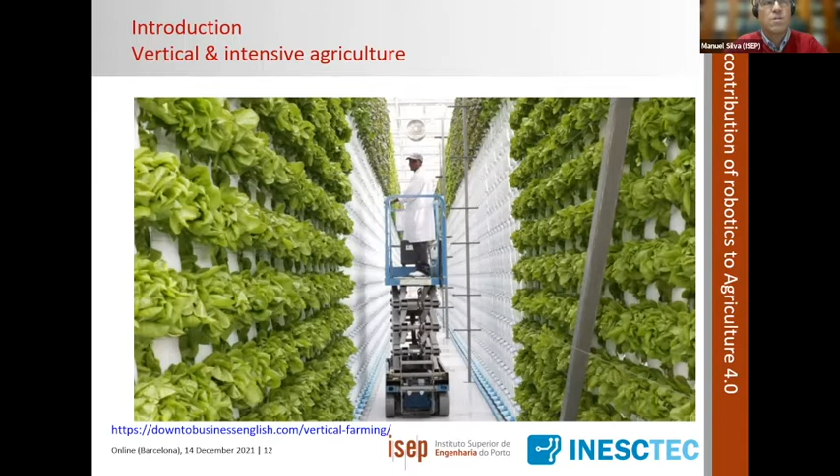Besides that, in order to reduce meat consumption, we have tried to develop lab-grown meats, but there are also several consumers that don't appreciate or that have some resistance to this sort of solution.

Besides this, one other alternative might be the use of insects for human consumption, which is also presenting several difficulties of being introduced in the market. So this is the present situation.

What we see from this is that there are several challenges being faced by agriculture. What we try to achieve is to have more sustainable agriculture, but we want to reach this sustainability without compromising productivity. So we want a sustainable agriculture that is competitive.

We can increase part of this, or have agriculture more competitive, by using some of the already available technology and also developing new technology. Here I am considering robotics. So the solution is to develop what we might call precision agriculture, or agriculture 4.0.

For me, these two concepts are very related, almost the same from my viewpoint. For those who are not aware, precision agriculture is a management strategy that uses electronic information and other technologies to gather, process, and analyze spatial and temporal data.

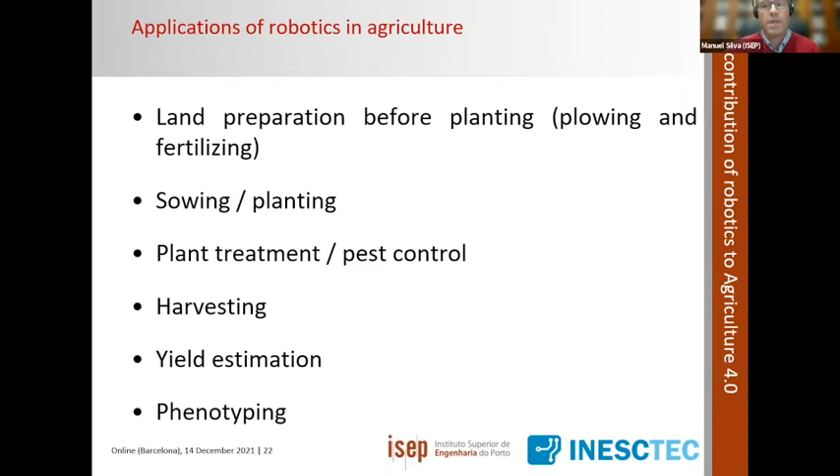And finally, on a smaller scale, we also have some robots for yield estimation and phenotyping of plants. Regarding all these applications in agriculture, robots are required to comply with at least four key areas. First, we need to choose an adequate platform for the mobility of the robot and for steering - the mechanical part of the robot, though there also needs to be electronic control of the motion.

Then, if we want a robot that performs something useful, the robot needs to go from one point to another - for instance, it needs to move between the crops without damaging them, and know where it is so it can apply some fertilizer or herbicide in a specific spot. This is what we call localization and navigation. It needs to know where it is - localization - and go to the spot we want - navigation. Robots also need to be able to sense the environment, sense the crops, sense the plants,

and also detect the targets on which they want to perform something useful. Finally, depending on the type of crop or fruit we're considering, the robot needs to have an appropriate end effector. This can be a spray tool for spraying herbicides or fertilizers, but it can also be, for instance, some sort of cutter for pruning or a gripper for picking berries or apples or oranges or stuff like that.

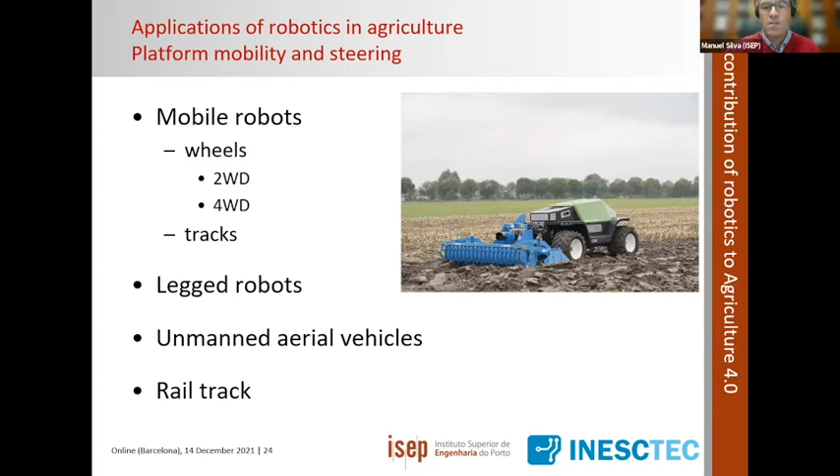One solution to overcome some of these problems is to use tracked robots. However, tracked robots have the difficulty that they destroy the soil - when they go several times over the same spot, they compress the soil, and this damages some of the soil qualities. So an alternative is to use legged robots.

We are witnessing a huge investment in legged robots, and we are now seeing the first legged robots being developed for agricultural tasks. Legged robots have the possibility of walking on very difficult ground, with steep slopes, rocks, ditches, and they can place their feet on disparate spots on the ground. So they can, for instance, avoid obstacles and holes on the ground, and they don't damage the crop.

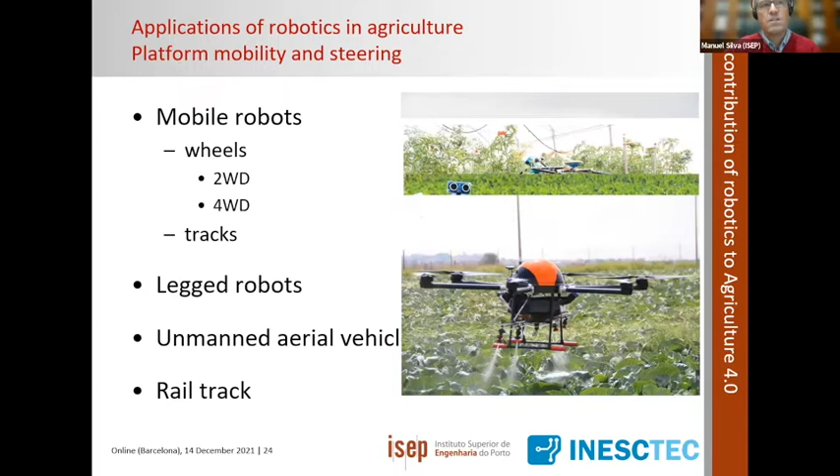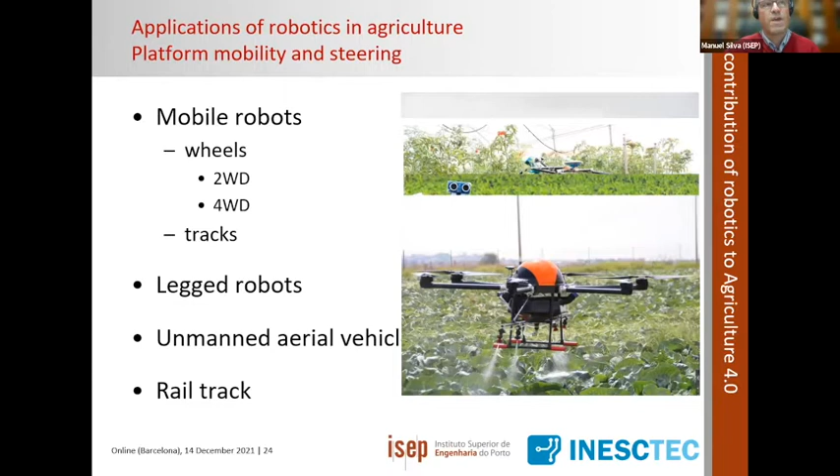So they can, for instance, place the feet on places where we don't have plants. Another alternative is to use unmanned aerial vehicles, mainly for spraying and also for detection of yield estimation and detection of health problems in plants. And finally, mainly in structured environments like vertical farms, we see the use of rail tracks for robots that run along the entire crop.

The other situation is localization and navigation. This concerns the movement of the robot through the crop fields. What we want is the robot to go from one place to another without damaging the crops and also avoiding obstacles. This is a very, very challenging task for autonomous robots.

In closed environments, for instance in factories and even inside houses, we are already able to develop robots that present very good localization characteristics. They are able to follow what we call natural marks, making a map of the environment, and based on that map, they are able to go from one place to the other.

But typically, that is not the situation on crop fields. While in factories and houses those natural marks are typically static and don't change over time, that does not happen in crop fields. Plants grow, we have branches that fall on the ground, some plants die, and so these natural marks just disappear.

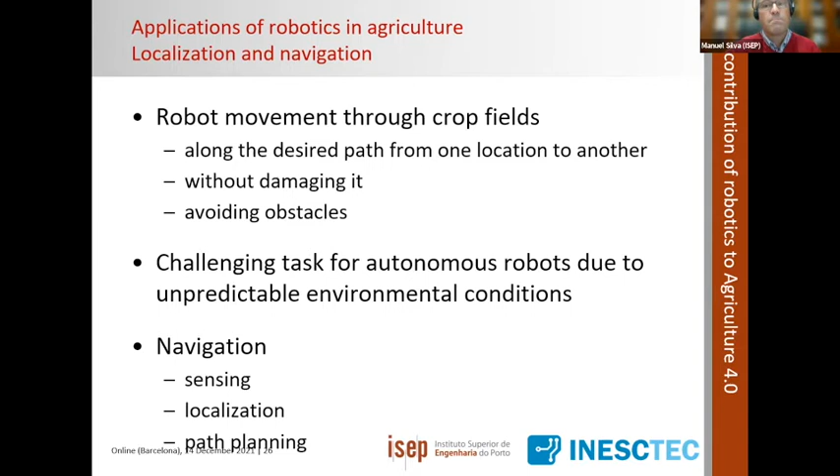Another problem is that in factories and inside homes we have environment conditions that are more or less static, so we can control the illumination. We don't have fog, we don't have dust. When we are outside, all these factors degrade the performance of sensors. So it is still relatively difficult, and presents several challenges, to develop robots that can perform navigation very well in outdoor environments.

So researchers have been using several different navigation technologies, mainly based on global navigation satellite systems. This is what we usually call GPS, but it's not just GPS, there are other systems for this.

But GPS has a problem: if we cannot spot the signals from the satellites, so if they are not in our line of sight, we lose the signal. This is sometimes a problem when we are working, for instance, in orchards where trees are hiding the signal.

So for this, we need to join these technologies with other technologies, like the use of inertial measurement units that measure the linear and rotational accelerations. By double integration, they allow us to see how our position, or the position of the robot, is evolving.

Another possibility here is also to use visual odometry, so to use information from cameras, from artificial vision, to understand how we are evolving on the crops or on the fields.

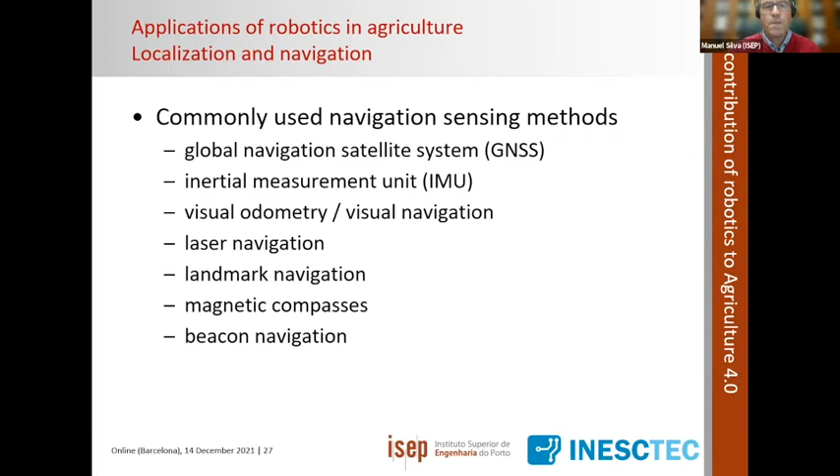Another situation that we have, and it's a very important one, is the question of sensing and target detection. This is one of the most relevant applications in agricultural tasks, and this is the core problem, because if we want to do something useful, we need to identify where we want to perform that work.

So we need, for instance, to detect if the plant has some health problem. We need to detect where we want to pulverize or spray a plant. We need to detect where we want to cut a branch if we are pruning, and we want to detect where we can find a fruit if we want to pick it up.

This also brings lots of problems to researchers, because plants are not all equal. They grow with different orientations, different characteristics, different colors. When we are in the field, we have different sun orientations, from the front, from the side, and all this makes it very difficult to clearly identify all these situations.

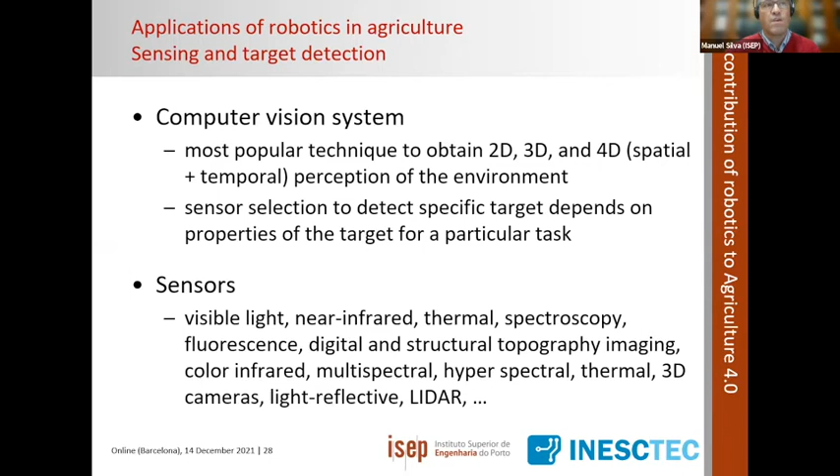For this, what we have been using is mainly computer vision systems with several different sensors, and we still have not found any particular sensor or algorithm that can solve all of the problems we have been facing. So this is also a continuous research line.

Also considering sensing and target detection, we have to consider that when we are trying to detect the targets, we also have different needs and different phases. So first, we need, for instance, to detect vegetation.

For instance, if we are picking up some fruit, we need to detect where the leaves of the plant are, since these leaves can be occluding the branch that we want to cut. So we need to detect vegetation from one side, and then we need to detect, for instance, some pest or branch to cut or some fruit. Besides all the problems I've already spoken about, we also have the need in the same robot or equipment to detect different things. This is more challenging than the applications we have in industrial environments.

Finally, regarding the targets, the detection of these targets can be very distinct depending on the tasks. If we are interested in land preparation or sowing and planting, in these cases we are mainly interested in detecting the area on which we want to perform our tasks. So we don't need very specific artificial vision systems or vision algorithms.

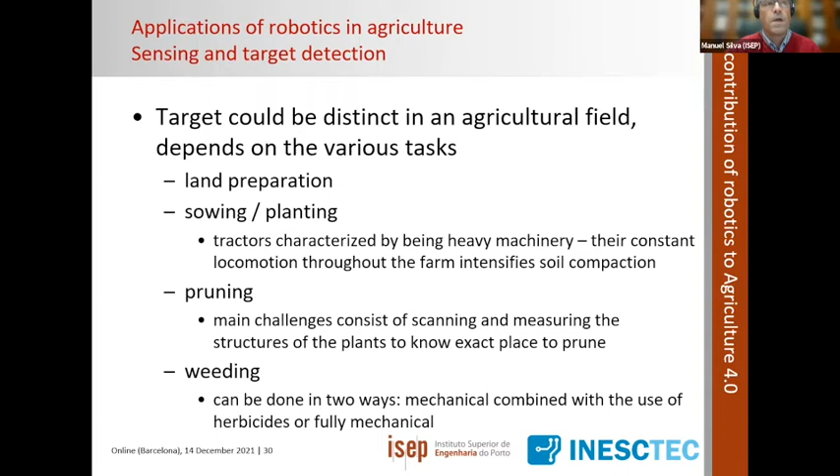If we want to perform weeding applications, we need to detect the plants and differentiate between the crop that we want to grow and what is a weed that we want to eliminate.

If we are concerned with spraying applications, we need to be concerned that leaves change color and shape with their growth. So there are already several problems besides those concerned with plant health. Sometimes it's very difficult to detect plagues on plants because, for instance, the insects are on the opposite side of the leaf. So more problems are presented here.

Finally, when we are considering harvesting or fruit picking, one difficulty is that the robot must go from plant to plant, detect the fruit it wants to pick, and pick it up without damaging the fruit. So this is also a very difficult problem.

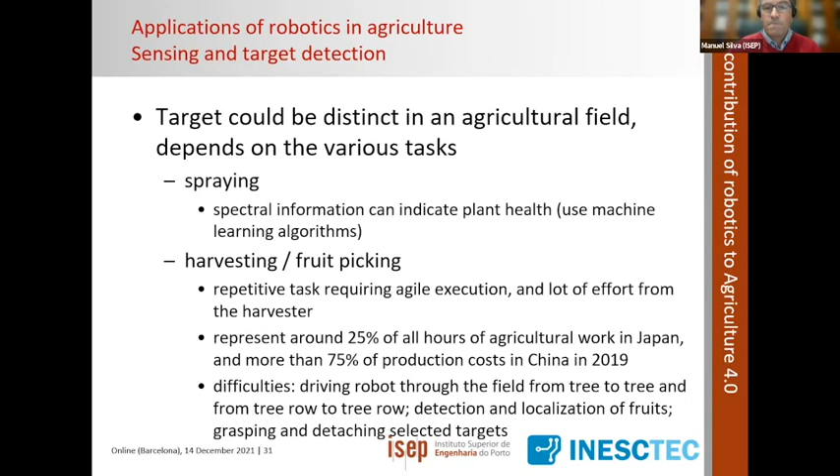Based on this, I'm just going to present now two projects. I had more information here, but I don't have the time. It's two very brief projects from INESC TEC, okay?

At INESC TEC, we also have a team working on research for agriculture. We are mainly focusing on the development of robots and automated solutions for these tasks. Our roadmap is mainly this: we started with monitoring applications, which are, let's say, the easiest ones to solve, although there are already several challenges. Then we are going up the scale to spraying, pruning, and harvesting.

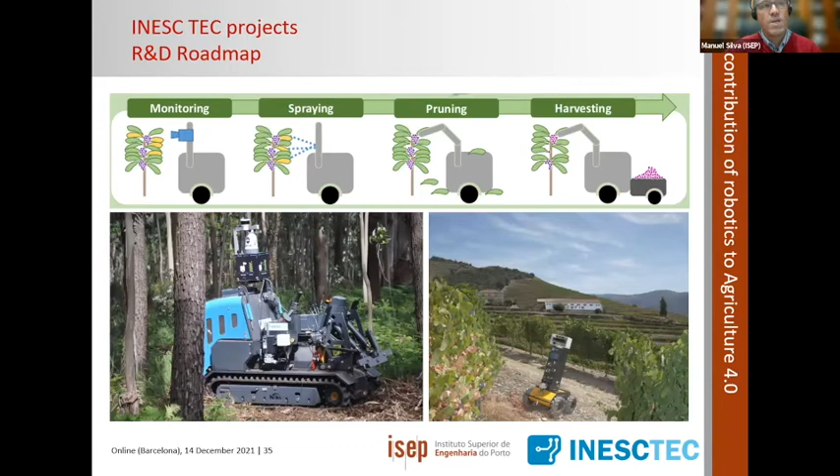What I'm going to present, I will just skip these two slides. I will start by presenting this video with some robots that we have developed, and while the video is being shown, I will describe the robots. So here I'm going to present the AgRob version XX robots. I will talk about version 14 and version 16. These were two of the robots we have developed, mainly for applications in the vineyards of the Douro region.

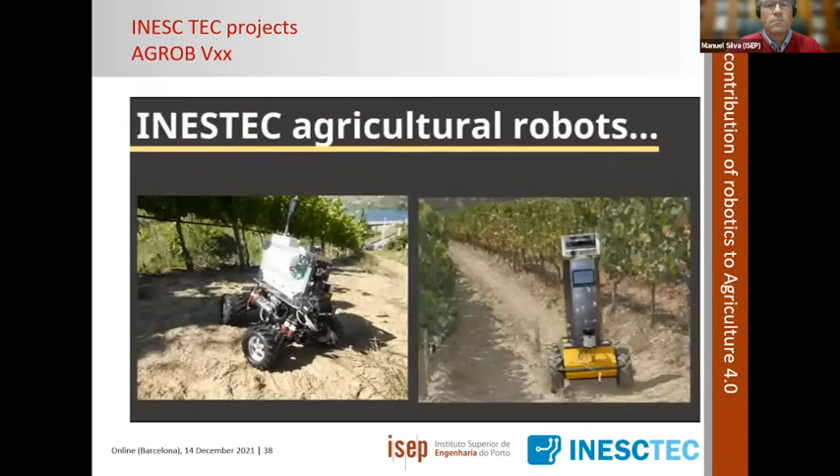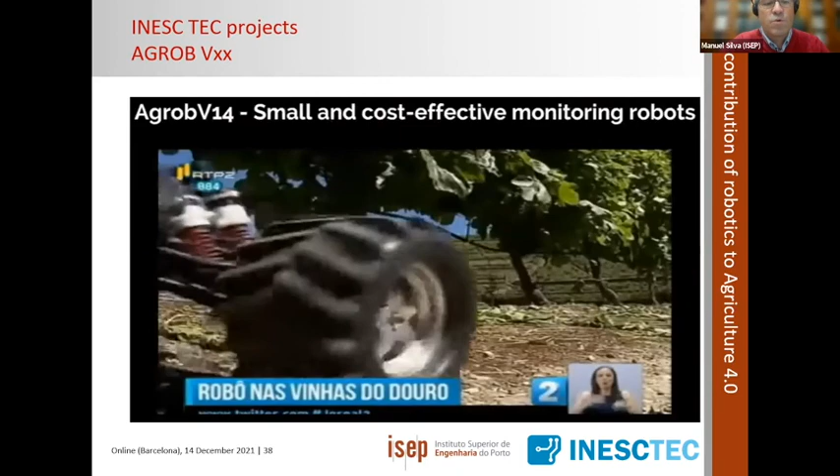So this is the AgRob version 14 robot. This was a robot developed to monitor the vineyards of the Douro region in Portugal, and those vineyards are in steep slope terrain. And this one is the AgRob version 16.

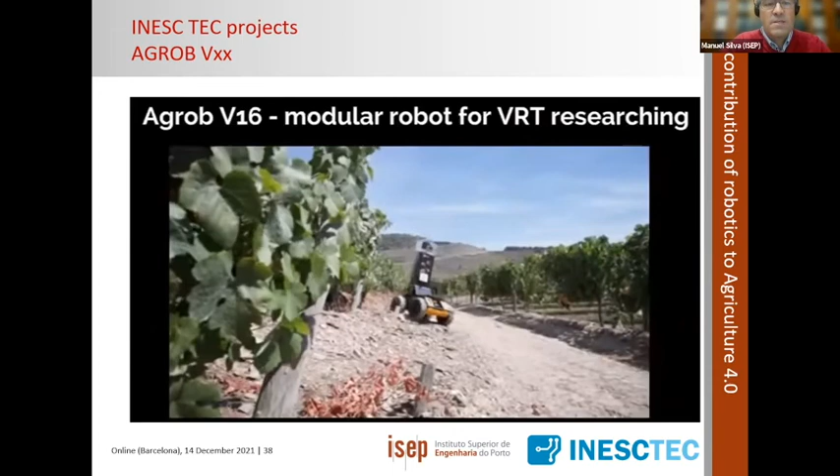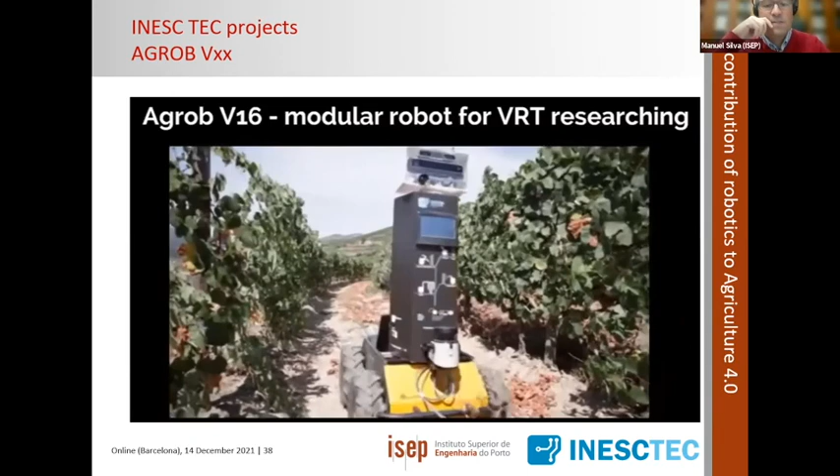It's a development of the previous robot, so it's a bigger one, and it's developed for yield estimation and pruning tasks. We have mainly worked on improving the robot's localization and positioning. What we are seeing here is the use of artificial vision systems to detect the plants and, based on that, to be able to localize the robots.

So this is the version 16 robot, and we can see it now working on some vineyards, being able to follow those steep terrains.

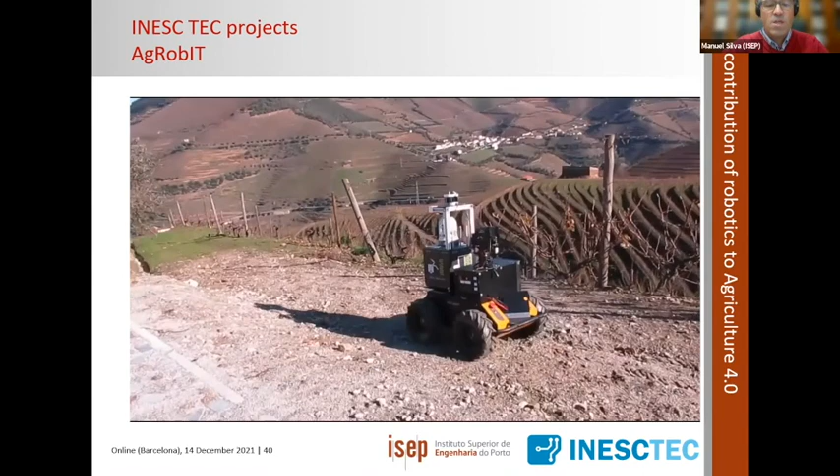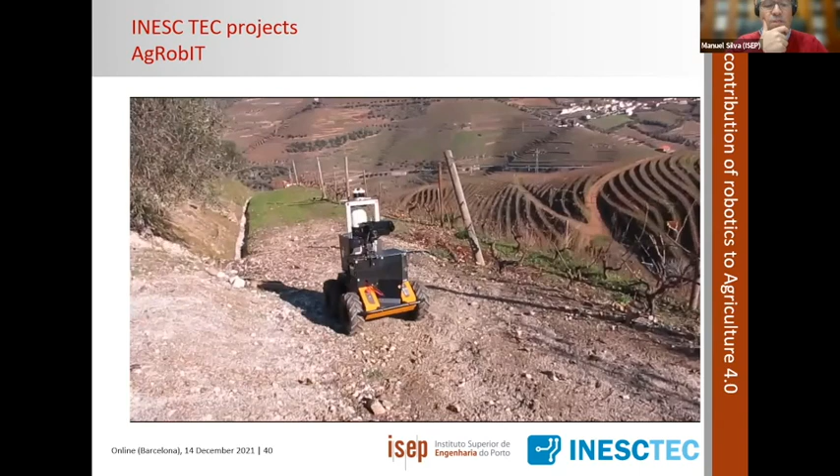For this robot, to improve its localization and positioning, we used a wireless sensor network, and we integrated the concepts of IoT and SLAM. This robot reads what we call the received signal strength indication. There is a Bluetooth low energy network that just sends some signals, and based on the intensity of the signal received from this network, the robot is able to understand where it is.

Anyway, you can see that, as I told you, four-wheel drive robots are what is more common today in agriculture, but you can see that while it's moving, mainly on very steep slopes, it still presents some difficulties.

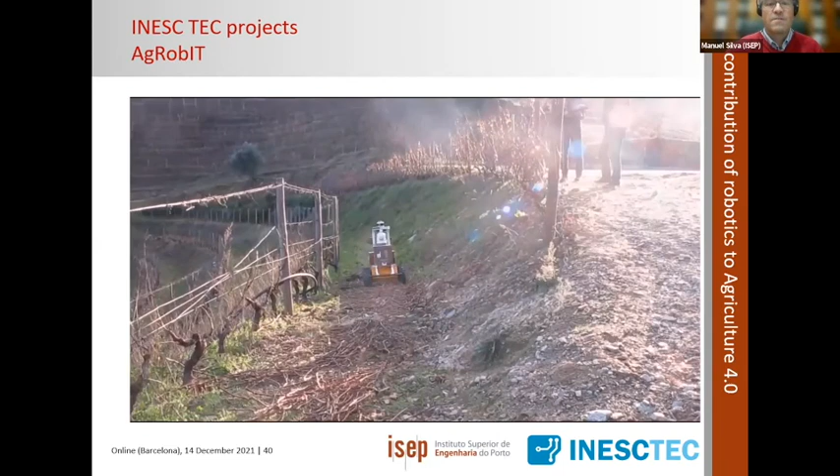I believe that time is going on, so I will just skip the next slides and go to the conclusions.

From what we have seen and what we have been analyzing, there is a huge research interest in these sort of applications. But there is still a very small number of commercial products, so we are mainly in the research area yet.

The main limitations we find in the robots already developed is that they present a relatively low speed compared with human operators or human labor, and the success rate is also relatively low. We're speaking about success rates around 80 to 90%, and this is very difficult due to those variable ambient conditions that I've stated before.

Regarding the major areas that we are predicting need future research, I believe we still need to develop lots of technologies concerning locomotion systems, sensors, or different types of sensors for detecting the plants and the pests. We also need lots of work on the computational aspects of these technologies, so we need to develop more robust computer vision algorithms and artificial intelligence algorithms for identifying these situations.